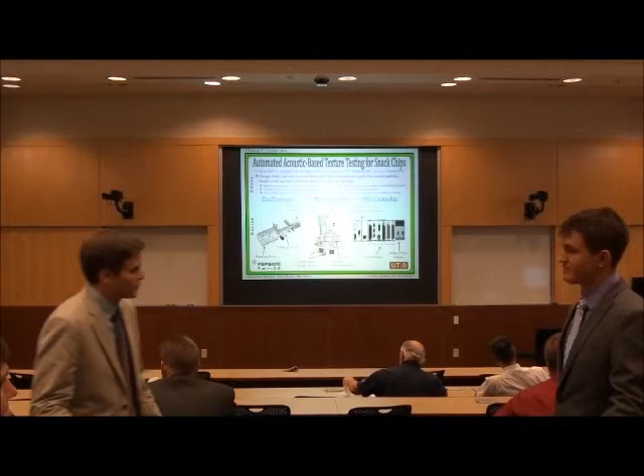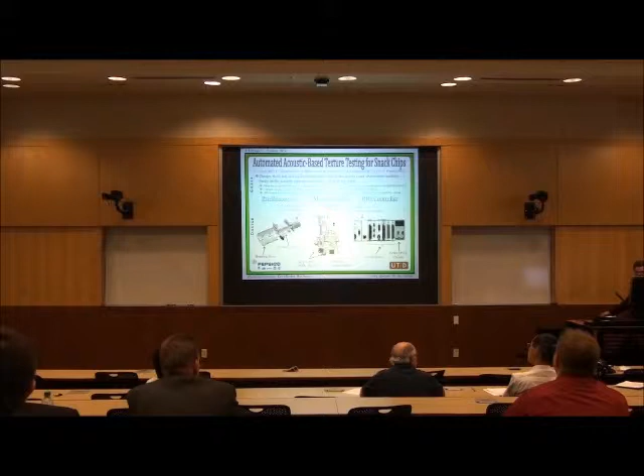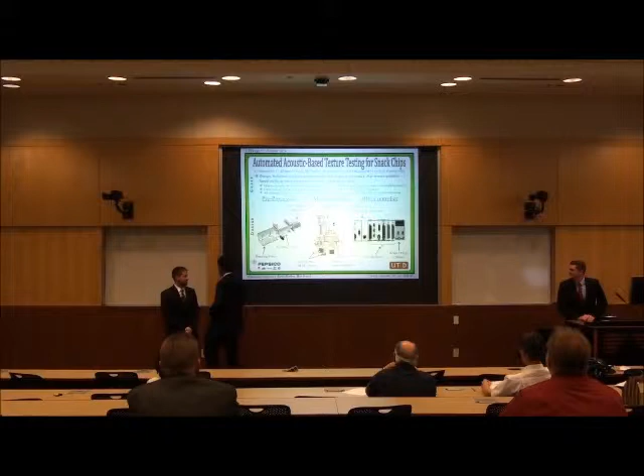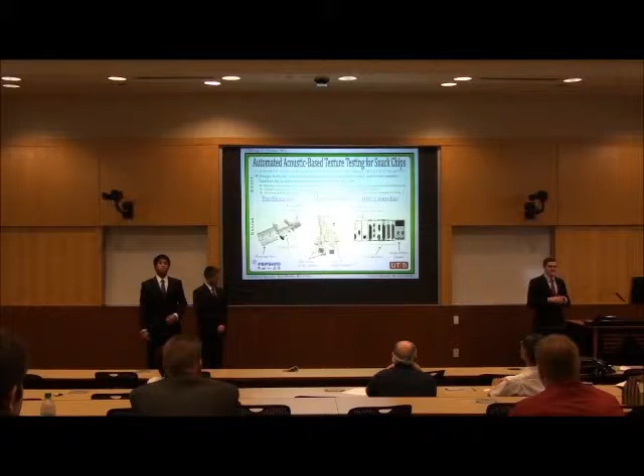Current methods to test texture for snack products require a panel of trained experts to take an already produced sample, taste it, and, as experts, quantify the texture of that product. Unfortunately, that TDS is expensive, extremely tedious, and doesn't provide any kind of real-time feedback in a process control system that allows snack product manufacturers, such as Frito-Lay, to control their processes based on the texture of the snack products they're producing.

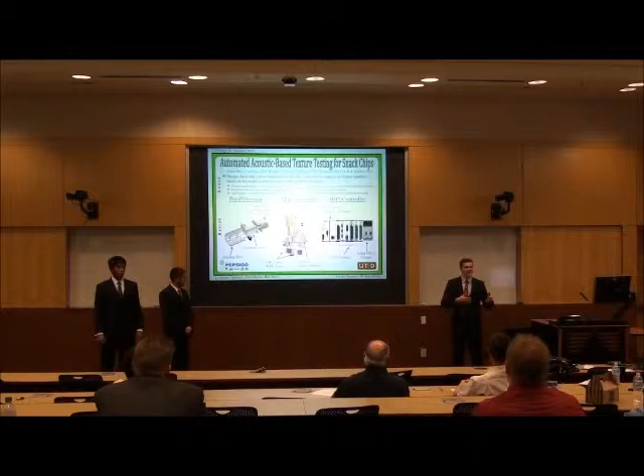Therefore, the goal for our project was to build a machine that could repeatedly characterize the texture attributes of a snack product in real time as it comes off the manufacturing line. This is done using the acoustic characteristic generated by the crushing event, by placing chips into a compression chamber and crushing them down, listening to the acoustic signal, performing some signal processing, and then generating a texture response associated with that sound.

Some of the requirements for our project were that it needs to be reconfigurable for new snack products. This means some of the mechanics of the design have to be easily taken off and replaced with different pieces, and the algorithm has to be adaptable so you can add in different kinds of responses. Another was that we couldn't use any custom electronic components. Since this is used on the industry floor, it needs to be easily maintained by electricians rather than electrical engineers. It was important that we use things that were easily replaceable in real time.

Another one was that all exposed components must be caustic washdown safe. Since this machine will be subject to the same sanitary conditions as any other food-grade device, all of our electrical components had to be able to withstand a caustic washdown sanitation process.

Our design uses three major components. There's a preprocessor that takes a full-size sample and steps it down into smaller pieces that are better for the acoustic algorithm to process. Then they move into the main assembly, where the ball screw actuator crushes the sample, and two high-precision microphones listen to that event. That signal is captured by our National Instruments CompactRIO, which does signal processing and outputs texture values to our user interface, a touch panel computer.

The results of our project were that we were able to program every piece of the system. We have a working user interface and a working CompactRIO controller, which required FPGA programming. Unfortunately, the motors for our project were a bit undersized, and that provided some major roadblocks at the end. However, we did everything we could to overcome that, and I encourage you to come by our booth and see our texture analysis process. Thank you.

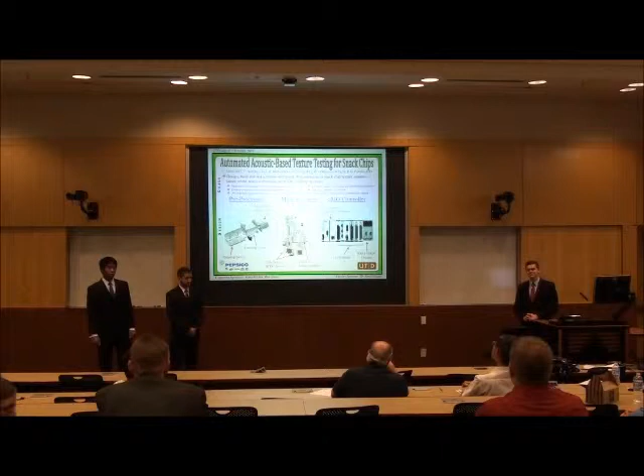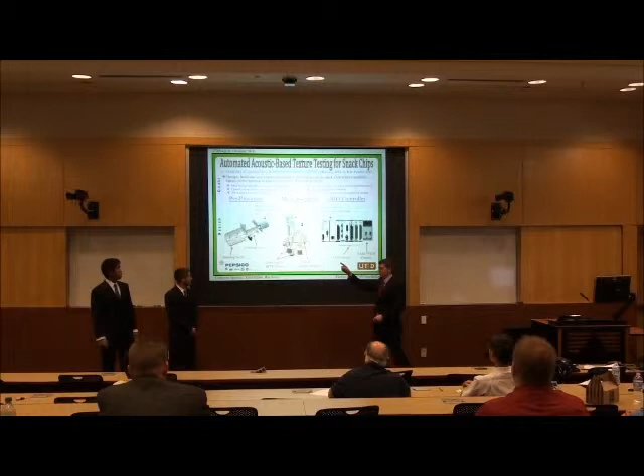Any questions? When you were making little chips out of big chips, is that a manual operation or is it automated off the line? It is automated, yes. Well, it will require user input. They'll have to put the chips into a hopper on the machine. However, there's a stepper motor on the back side, which you can see on our actual device, that moves these crushing teeth and forces the chips past the shearing blades that crush the chips automatically.

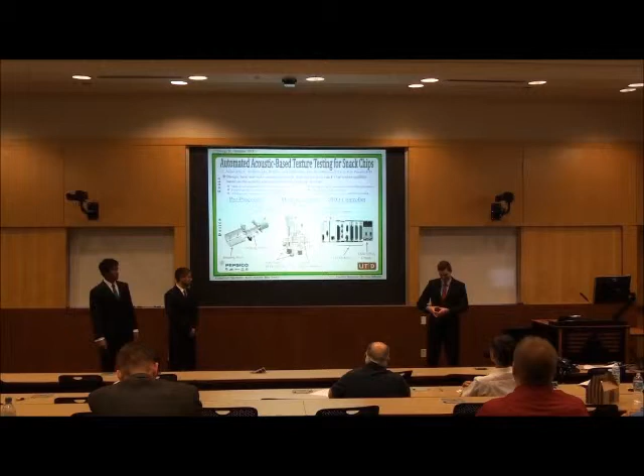That's actually a big improvement. When we were doing research at PepsiCo at the beginning of this project, you had to crush the chips through a sieve by hand, which, when you're trying to get this size chips in a tube this big, takes a long time. So this automatic process is a big improvement.

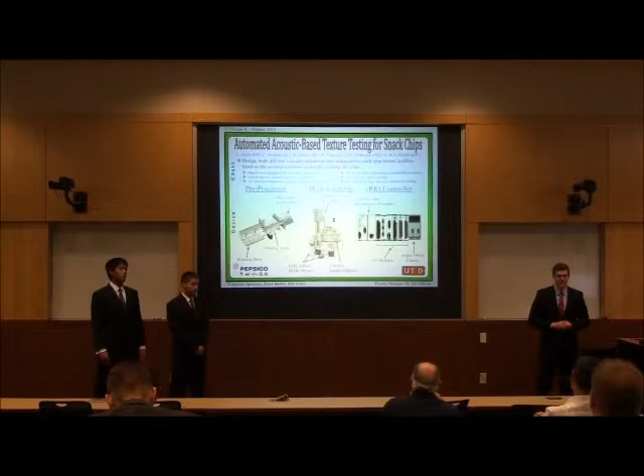So out of the two pieces of equipment there, did you design, develop, and build this from scratch? We did, absolutely. We actually have three mechanical engineers on our team. One, Joe Portella, is sitting right back there, and we have two others. They designed all of the mechanics custom for this machine, so everything you see on our device at our booth is custom made.

What's the budget for building all these? We can't give you an exact number. I can say it is significantly higher than your typical senior design project. A National Instruments CompactRIO by itself is many thousands of dollars. And then we have quite a few custom fabricated stainless steel pieces, and stainless steel by itself is...

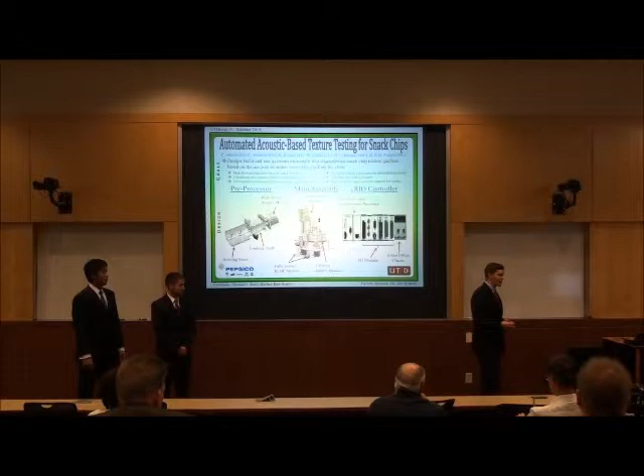So did you actually get some data that correlates your acoustics to tasting? We did, absolutely. PepsiCo had done some research prior to this project to validate that proof of concept with a different setup that used a few different pieces shoved together, and ours was to combine that process. We were able to crush a chip and, using their model, see that the texture result matches what it should be.

Is there a software member of your team? We all three designed the software. Wayne did most of the user interface programming, I did all the motion control code, and Claudio performed most of the signal processing. The entire thing was in LabVIEW, user interface and FPGA. Time for one last question.

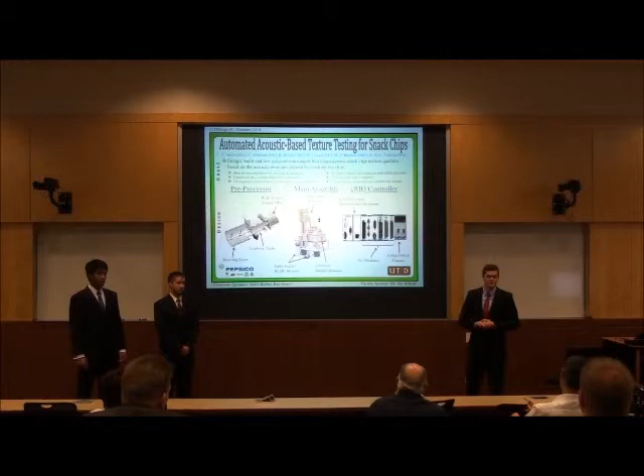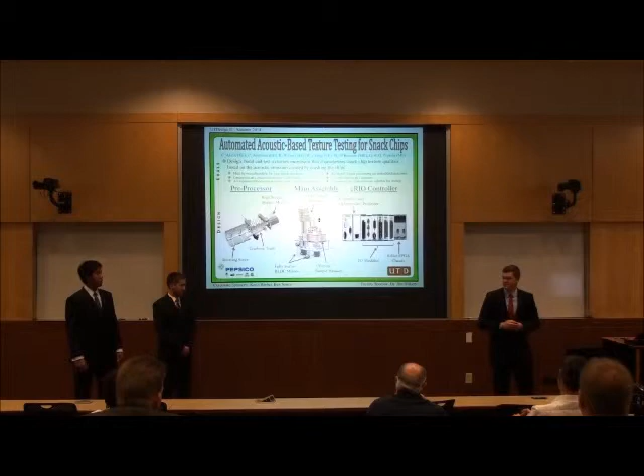So for the acoustic data you collected, how much is from the mechanics itself and how much is from the chips? Sure, that was definitely a significant portion of the design. Claudio wrote some pretty intelligent noise canceling software. For example, we know the speed of the motors, so we can cancel out that frequency to an extent.

The other thing is, before the piston actually hits the chips, there's a little bit of time where we can listen to that signal, and we have a good idea of the characteristic of the machine without the chip crushing event. We can use that to set a noise floor to cancel that noise out.